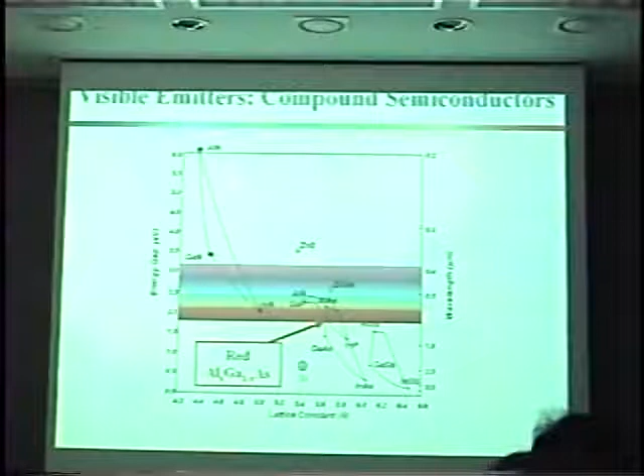I'm sure most people have seen this plot of band gap versus lattice constant. The reason these are two important physical parameters is, of course, that the energy gap is characteristic of the light emission wavelength, and the lattice constant is required because the lattice mismatch often deteriorates the material quality, and generally the devices we're trying to make are heterostructure devices, and if possible we like to do the lattice matching.

So often we're doing band gap engineering, where we're engineering the band gap to select a particular wavelength of emission. At the same time, we're trying to match lattice parameters between active layers and confining layers to be able to get a higher quality device.

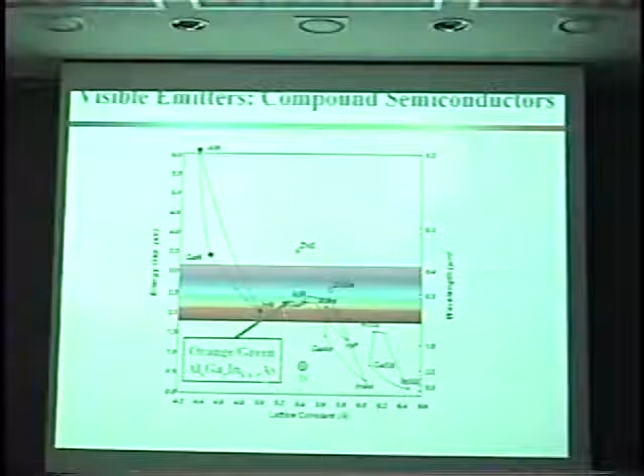In the 1960s, we saw the development of red light-emitting diodes based on gallium arsenide. They were further refined by adding aluminum, and it's a very common product. The price of a red LED today is on the order of a few cents. It's a commodity. Not too long after, we started developing phosphides, aluminum gallium indium phosphide, that gave very strong efficiency into the green region. So for many years we had red and green of the RGB, but we didn't have the blue.

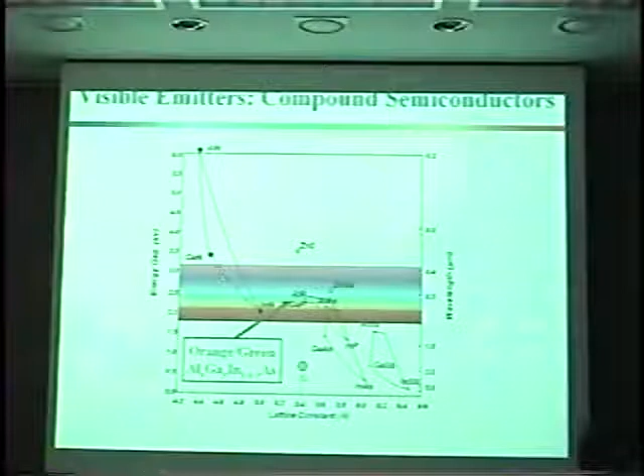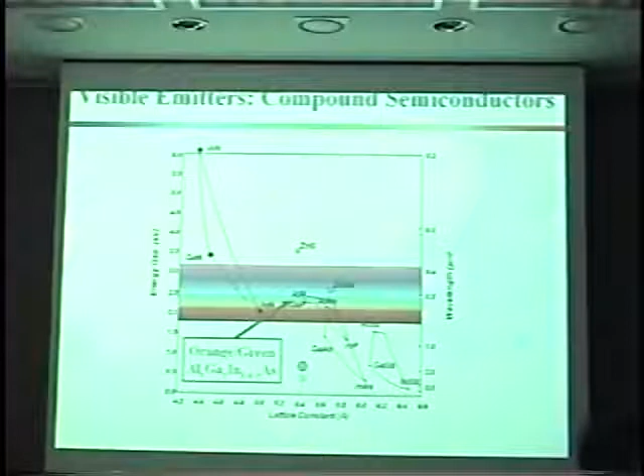And it wasn't until around 1992 when Shuji Nakamura came along and demonstrated that gallium indium nitride, an active layer of a composition somewhere around here, could get very efficient blue emission by forming a solid solution between gallium nitride and indium nitride. So with the advent of the gallium nitride based blue LED, we had the red, green, blue combination, and as a result we have the possibility then for an LED display.

So some of the applications that have come up have all been, of course, based on the LED, because we now have blue, red, and green. But one of the first ones that was promised was the area of solid-state lighting. This is, for example, a headlight in a car, but there's also the possibility of replacing all the lighting applications that we have. The energy savings there is tremendous. It's probably the largest market. However, the efficiency considerations, brightness considerations, and also cost of manufacturing have yet to realize it, except for niche applications such as street lights, signs, and automobile lighting.

But the hope of the future is that the full spectrum of solid-state lighting will be accessible to gallium nitride-based materials. Of course, there's some efforts to try to make the ultimate device, which is the laser diode, which has applications in communications as well as in storage and other areas. One area very interesting to displays is the use of LED for backlighting. I think recently Samsung introduced a 46-inch LED backlit television that's now for sale in the commercial market. And as we've heard over the past couple days, display is a very large market, particularly important to Korea.

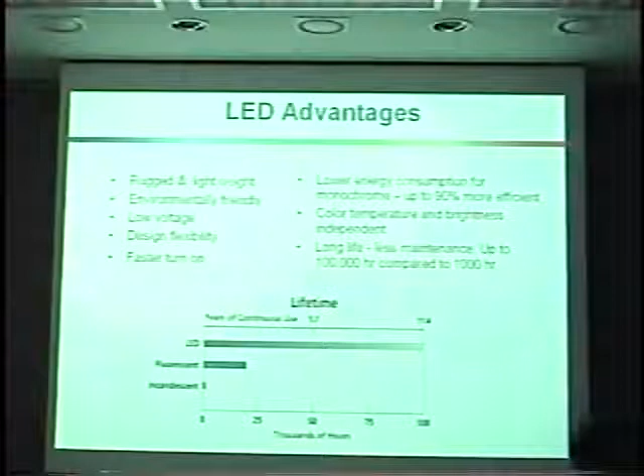Here's a comparison of the LED. It's about 7 times brighter than an incandescent light bulb, for example. The color temperatures and brightness are independent, and of course there's a long lifetime. This is a comparison of the lifetime of an LED versus, for example, fluorescent or incandescent light.

What are the approaches used for white light-emitting diodes? There are basically 3 core approaches. The first one, the most obvious, of course, is now that we have the capability of generating red, green, blue LEDs, let's just combine them to produce white light. Tuning the frequencies and the powers, we can tune the CIE of the white and get excellent control over the color gamut.

A common approach that's over here on the right-hand side is to take a blue LED, which is gallium nitride based, and on top of it put a yellow phosphor, a broad emitting yellow phosphor, which combined with the blue emission will give you a fairly good white light. Most of the white LEDs that you probably see now have a little blue tint to them. They're being made with this particular approach here.

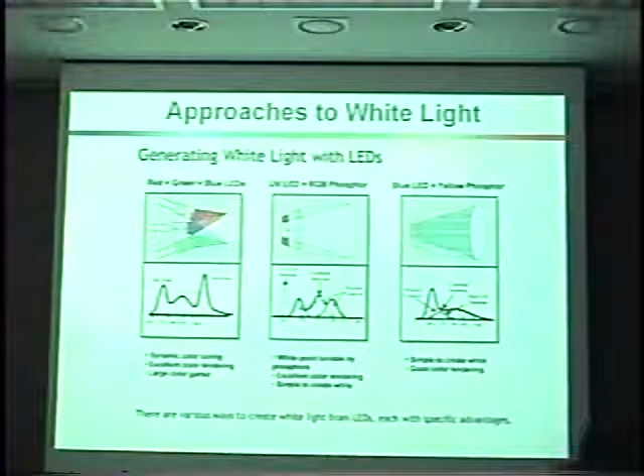There's been some recent work actually in the US, as well as Korea, to try to do a UV LED. Add a little aluminum to it, take it into the UV. This then opens up a wide range of phosphors that are available to do red, green, blue, so we would have a mixed phosphor excited by a UV photon from a gallium aluminum nitride LED, and then we can mix these appropriately and get a very nice white light out of it. Those are the 3 approaches. Most of what you see in the market today is over here.

Okay, I'm going to now talk about 3 or 4 subjects. The first one I'm going to talk about is the substrate issue. The problem with gallium nitride was for many years. Actually, there was a lot of work going on in the 70s to try to produce gallium nitride. At the same time, people were working on zinc selenide in the hope of getting blue. Zinc selenide is where most of the early success was taken. Unfortunately, zinc selenide is a rather soft material, and the quality of the material was not very good. There's also a problem with doping and p-type.

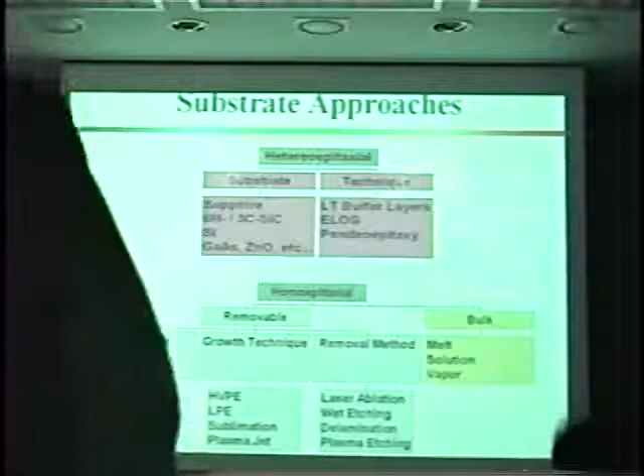But with the advent of high-quality gallium nitride and p-type doping, the gallium nitride work had surpassed the zinc selenide. But there still is not a good substrate for gallium nitride. No one has yet successfully grown large area bulk gallium nitride on a routine basis at low cost, as we have with silicon or gallium arsenide, for example.

So there are basically 2 approaches, 2 general classes that one might take. One is to take an existing substrate, so sapphire is most common, silicon carbide. People have also investigated silicon, gallium arsenide, zinc oxide, a variety of other substrates, and just grow heteroepitaxially on the mismatched substrate. And that's currently what we are doing in the commercial applications.

The problem with that, of course, is that the gallium nitride structural quality is not all that good. The dislocation density is on the order of about 10 to the 8th per square centimeter. It gets somewhat better with some effort, but compared to gallium arsenide or silicon, the dislocation density is extremely high. In fact, that's one of the mysteries of gallium nitride. How can we get devices that are so efficient yet have such a high density of dislocations in the material?

Very surprising, but we do. One suggestion is that the low hole mobility, free hole mobility, is responsible for that. It really doesn't have the ability to get to a dislocation or a grain boundary to recombine non-radiatively. Rather, it sits there and waits for an electron to come by.

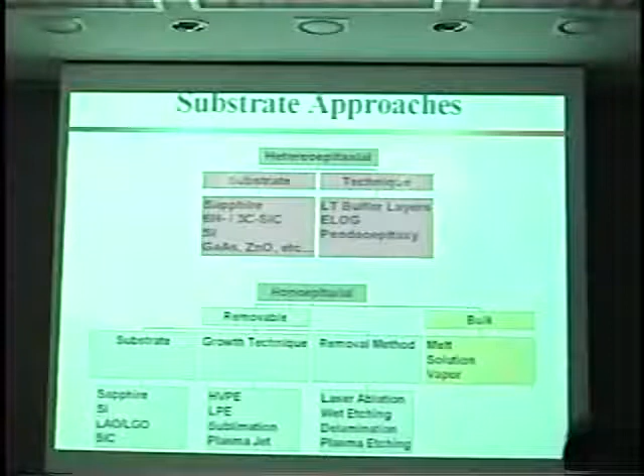What I'm going to talk about today, I'm going to talk about first some of our work with silicon, that is heteroepitaxy on silicon, which I won't show today, but we've been doing some thick film gallium nitride on silicon. And then I'll also talk about growth on lithium gallate, which is almost nearly a lattice match to gallium nitride.

So gallium nitride on silicon. Well, what are the advantages? Of course, silicon is an advantage. It's a very low cost, large area substrate, outstanding quality, zero dislocation density, easily doped N and P type, very good thermal conductivity, which is important for some of these device applications. And if we're going to integrate some of the drive electronics, for example, very easy to do in silicon substrates. So there's a lot of motivation to be able to do gallium nitride on silicon.

However, it does have an extremely large mismatch, 17%. The thermal expansion coefficient is different as well by quite a bit, 56%. So the relatively high temperature growth of gallium nitride, on the order of about 1050 degrees C, produces a large strain, which then can deteriorate the quality of the gallium nitride.

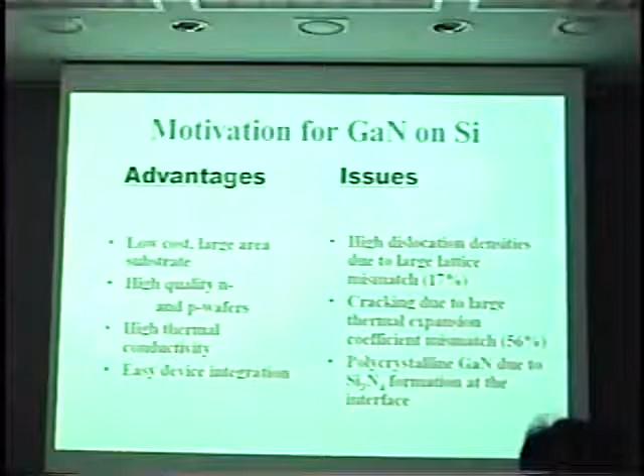Also, people have not had very good luck growing gallium nitride. Gallium nitride will not grow on SiO2. If you remove the oxide and you start your growth and you're using ammonia as your precursor, you'll quickly form a silicon nitride, which again prevents high quality growth on silicon.

So we took our standard approach. We tend to use a little bit lower temperature on our growth than typical, but our standard approach for doing gallium nitride on some other substrates was to grow using triethylgallium and ammonia at 850 degrees centigrade. When we did that, you can see we get polycrystalline gallium nitride. Not very good quality at all. It always resulted in polycrystalline material, only partially covered. We suspected that because we did a nice standard etch on silicon prep, we had a silicon nitride layer forming.

So, like a good chemical engineer, we went to use some thermodynamics. We estimated the phase diagram for the silicon, oxygen, nitrogen, gallium system. That was not previously known, so we had to use some techniques to estimate it. We used a program called Thermo-Calc. And here is the low silicon mole fraction, constant gallium nitride composition phase diagram.

And the thing I want to point out is, as long as we're below this monotectic line, we have only gallium nitride and SiO2 stable. Silicon nitride is not stable. So that suggested to us, if we keep our initial growth temperature down below this monotectic temperature, we should be able to avoid the formation of silicon nitride.

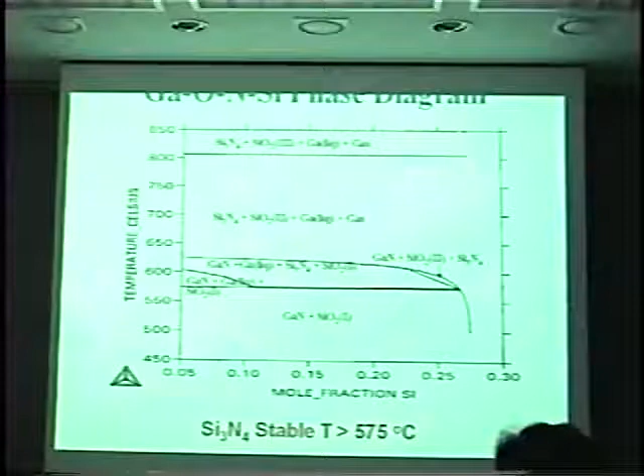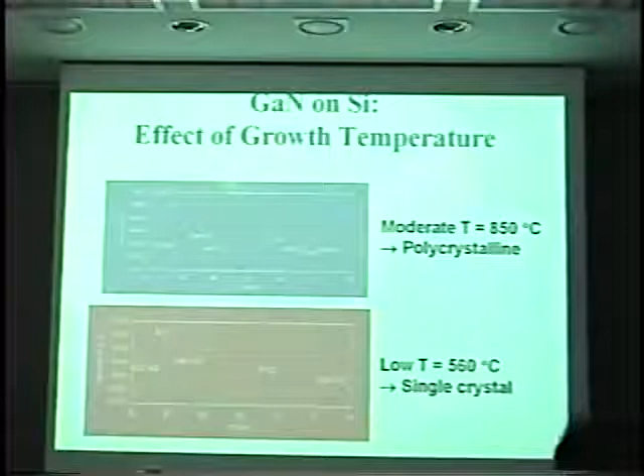Well, here's what we did. Again, comparing what we got at 850 to what we got at 560 degrees C, voila, we have single crystal gallium nitride of relatively high quality. So this technique apparently avoids the formation of the silicon nitride interface.

This is further verified by a high-resolution TEM micrograph that shows the lattice image of silicon 111. It shows a 2 nanometer, 4 or 5 layer silicon oxynitride interface, and then, of course with a small area, high quality gallium nitride C-oriented material. The selected area diffraction pattern shows that indeed it is single crystal, fairly well lattice matched to the underlying silicon.

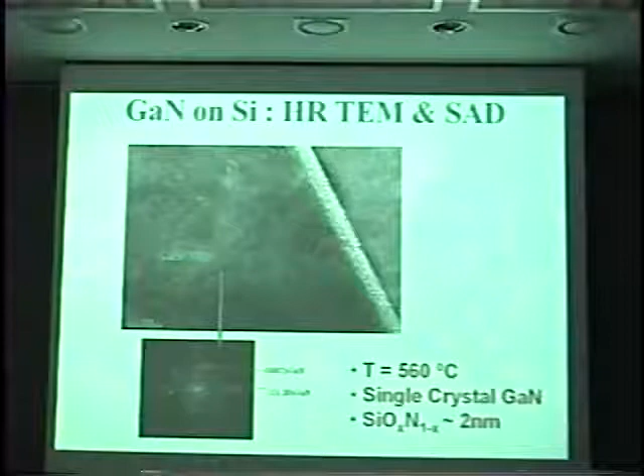There is this layer, this compliant layer that forms during the process. What we believe is going on is, even though we have a clean silicon interface to begin with, there is dissolved oxygen in the silicon, or perhaps we do have a little oxygen coming off the walls, but we form this silicon oxynitride compliant interface. If we go and look at the SIMS profile across that interface, we see both oxygen and nitrogen at that interface.

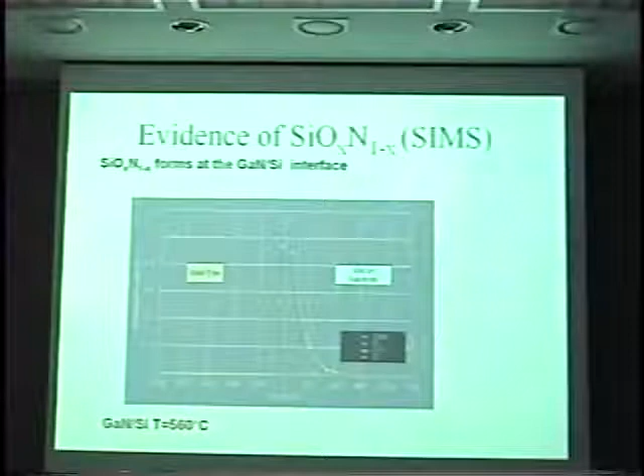And if we go look at XPS to look at the bonding structure, you see that if we expose this surface to ammonia with our cleaning process, we get evidence of both silicon-oxygen and silicon-nitrogen bonds. If we use only inert nitrogen, we have no evidence of the silicon-nitrogen bond, although there's a little bit of residual SiO, either coming from the reactor itself or from just beneath the surface.

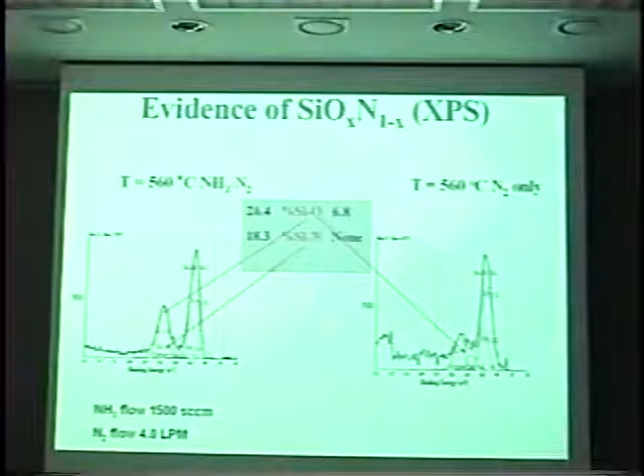So, as a result, we do form this SiON solid solution, roughly perhaps equimolar oxygen and nitrogen bonds, or close to it, that is able to serve as a compliant interface between the highly mismatched silicon and the gallium nitride grown upon it. We find if we get it too thick, it doesn't work. If we get it too thin, it doesn't work. If we change our temperature just above that 575 line, it doesn't work. It's a fairly narrow window where you do get the high quality silicon oxynitride.

We've also looked at trying some other buffer layers. Now that, by the way, was gallium nitride grown directly on silicon. There was no intentional buffer layer placed there. That gallium nitride, I believe, is the highest quality gallium nitride that's been grown directly on silicon to date. It has a full width half max on the high resolution XRD, the 400 reflection, of about 800 arc seconds. So its dislocation densities are on the order of about 10^7 per square centimeter. So for direct growth of gallium nitride on silicon, it's considered very high quality material. It's the highest, I believe, that's been grown.

Another approach is to intentionally put a buffer layer down there that's better lattice matched, or perhaps softer, that can serve as a compliant interface. The candidates I'm going to talk about today are aluminum nitride, which has only a slightly smaller lattice parameter than gallium nitride, as well as zinc oxide, which is fairly closely lattice matched, a little over 2% mismatch, and boron phosphide, which no one has tried before. Boron phosphide is nearly lattice matched, and can also be grown epitaxially on silicon.

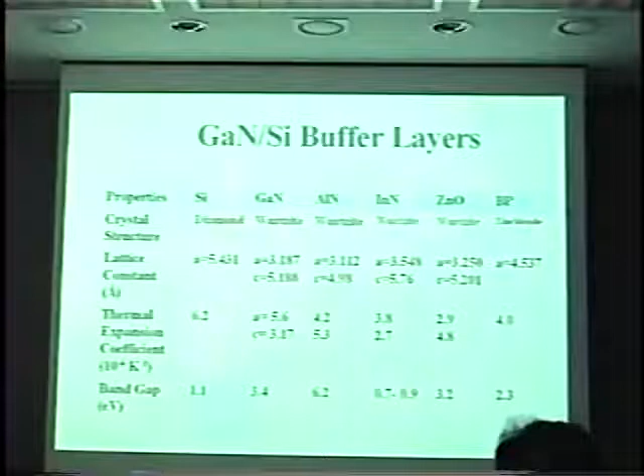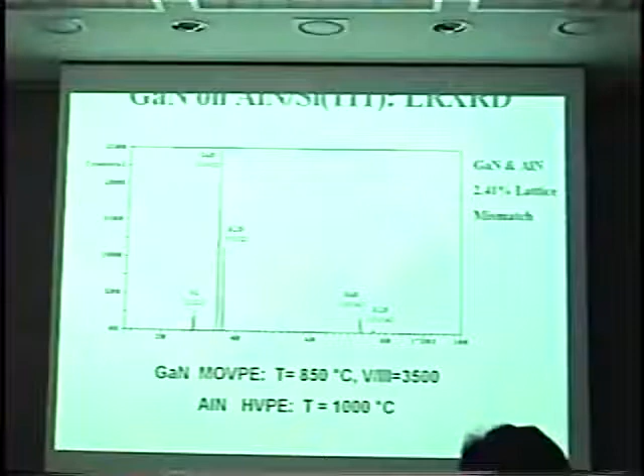So we took some aluminum nitride, we grew it on silicon by hydride VPE, using the chloride of aluminum as well as ammonia at 1,000 degrees C. And we came back and grew in our traditional commercial MOCVD system at our typical growth conditions. And you can see indeed we get single phase, single crystalline gallium nitride. If we look at the quality of the gallium nitride, it is relatively high. In fact, it's the best gallium nitride we've grown yet on silicon.

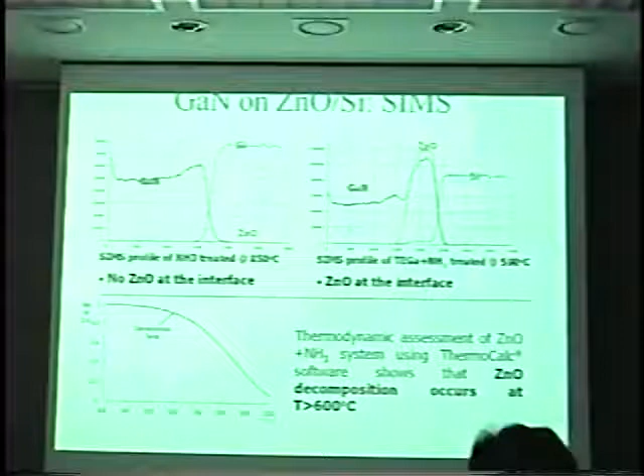Another approach was to use zinc oxide. Zinc oxide is fairly closely lattice matched to gallium nitride. The problem with zinc oxide, though, is it's fairly unstable. Thermodynamic analysis indicates that above about 600 degrees centigrade, the zinc oxide will thermally decompose, and we really won't have the buffer layer to grow upon. In fact, here are some preliminary experiments we did with ammonia treatment. At 850 C, we see no evidence of zinc oxide. The zinc oxide just dissolved into the gallium nitride and underlying silicon. But if we keep the temperature below about 600 degrees C, we can retain the zinc oxide at the interface.

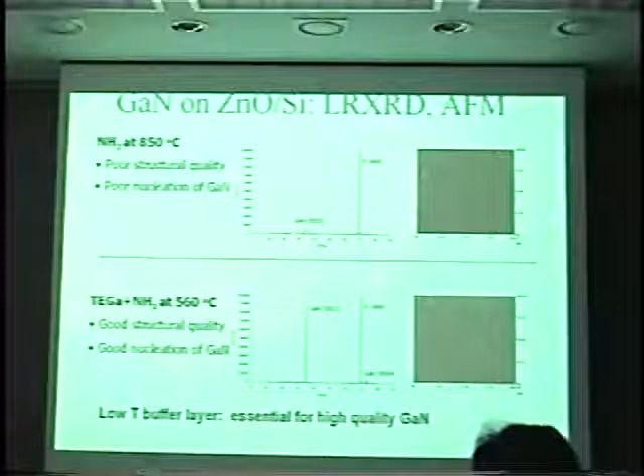Here is just a low resolution XRD scan of gallium nitride grown at the higher temperature. We get very poor gallium nitride signal relative to the underlying silicon. However, doing the low temperature buffer layer growth of gallium nitride on the zinc oxide produced a smoother surface morphology as well as much higher quality gallium nitride.

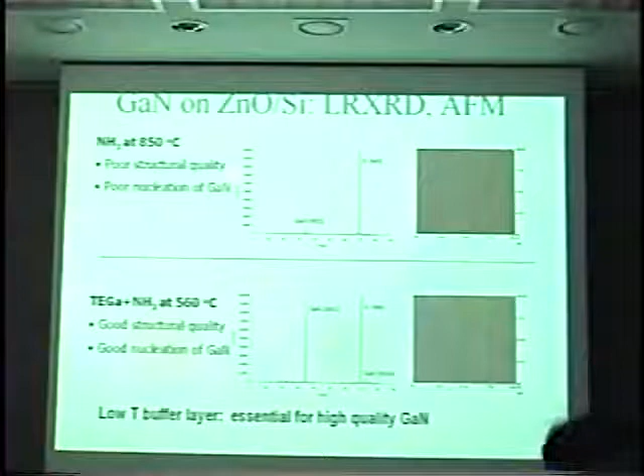The zinc oxide was put down by pulsed laser deposition. Interestingly, it grew C-oriented regardless of whether we were using 111 or 100 silicon. Very surprising. The quality of the gallium nitride grown on the zinc oxide, however, is not as good as that grown on aluminum nitride, or even that directly grown using the in situ oxynitride interface.

We had a program trying to grow cubic boron nitride. Cubic boron nitride, as you may know, is a very difficult material to grow. It's very hard. It is also easily doped, and so it was suggested for ultra-high temperature power electronics using diamond/boron nitride interfaces to develop PN junctions.

One of the approaches we tried to grow cubic boron nitride was to first grow boron phosphide. Boron phosphide is relatively easy to grow. We use boron trichloride and phosphorus trichloride or phosphine, and we're able to grow successfully boron phosphide on silicon. Also, nitrogen or ammonia should reduce boron phosphide to form boron nitride.

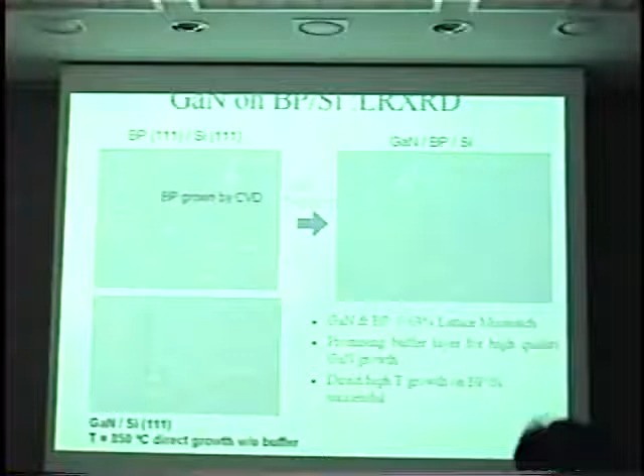So we took some of our boron phosphide that we had grown by CVD, and we tried to grow directly at high temperature without a buffer layer the gallium nitride, and the result was very, very good. We got single crystal gallium nitride, fairly high quality, and you can see strong 002 reflection as well as the 004 reflection. And this has encouraged us to continue on with boron phosphide as an interfacial buffer layer.

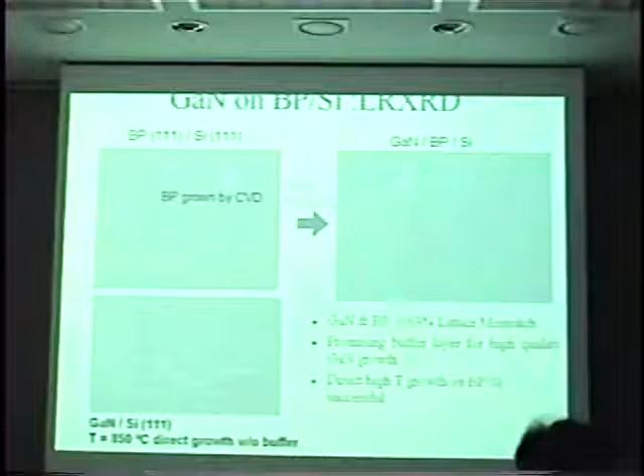So I think work that we've been doing over the last few years of trying to grow gallium nitride on silicon is very promising. And eventually, I think for some device applications, silicon may become the preferred substrate. We've also been trying, once we take this fairly high quality gallium nitride on silicon, to grow very thick films of gallium nitride, on the order of a few hundred microns, and then to remove the silicon and leave behind freestanding gallium nitride.

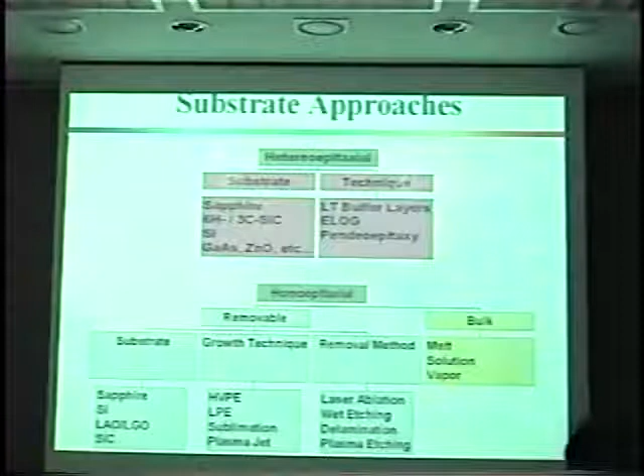I won't show you the results, but I'll report that we have successfully grown thick gallium nitride on silicon without cracking. And so that's a fairly good result. Part of the result is having that compliant layer, but it's also a result of us using a lower growth temperature and therefore incorporating less thermal expansion strain energy.

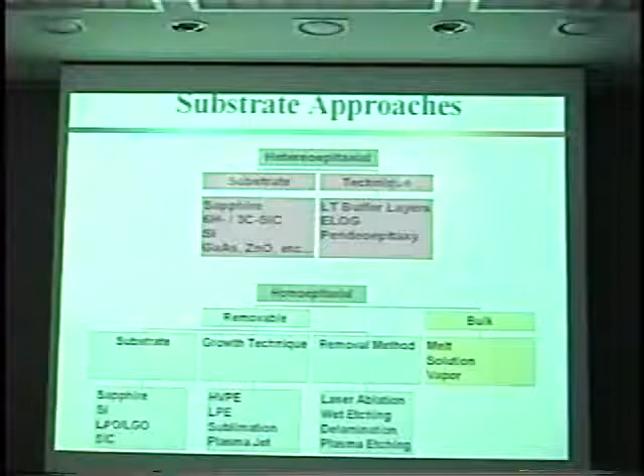All right, I'm going to move now and talk about growth on lithium gallate, LGO we call it. And so the idea here is to first grow a seed layer of gallium nitride onto LGO using traditional techniques, and then come back and grow very thick by hydride vapor phase epitaxy a few hundred micron gallium nitride, and then to remove the substrate.

Okay. So people have tried all these substrates to date. They've tried these techniques, not all to each substrate, and there's a variety of techniques people have used for removal of the handling substrate. The approach I'm going to talk about is LGO as the substrate, an MOCVD buffer layer, and then hydride VPE growth of thick gallium nitride. And what's going to be unusual is that if conditions are chosen right and the interface developed correctly, we can get the gallium nitride to release automatically from the underlying LGO substrate without any removal, and the LGO substrate can be reused.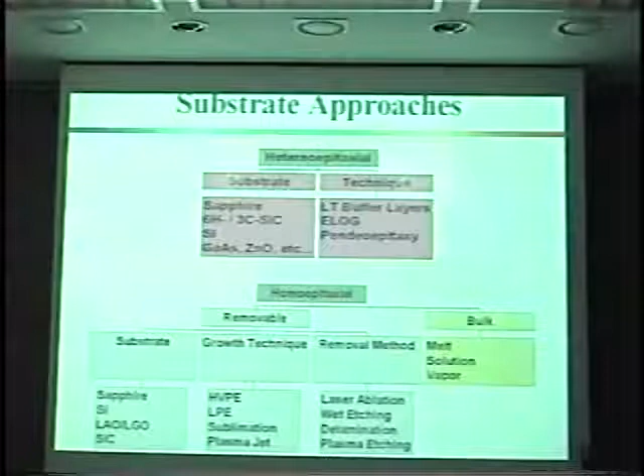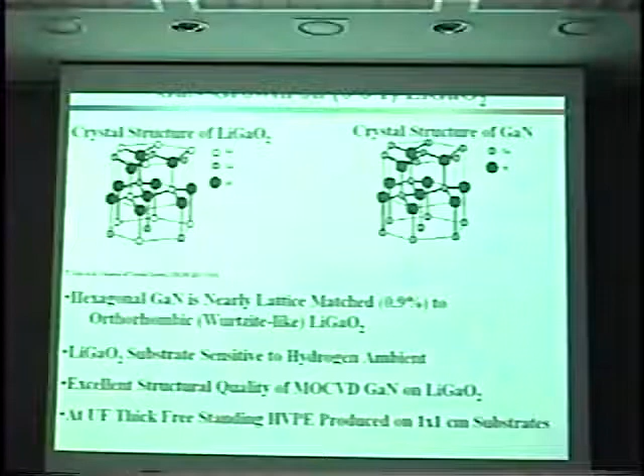Here's the crystal structure of LGO. It's orthorhombic, but it's nearly hexagonal and a very small mismatch to gallium nitride. Some results that compare what were some of our first attempts. We would take as-received LGO. It was just being produced and it was not available commercially when we started. You can see the top surface is not crystalline. There's a lot of damage. The polishing procedures were not in place.

However, we found that if we would do a nitridation of the interface, and this is the LGO, this is an interfacial layer, and then we would have gallium nitride going on that. If we just did a nitridation of the LGO at 850 degrees C, we would form this very thin, on the order of about 20 angstrom, lithium gallium oxynitride compliant layer. And not only that, which is very unusual, the underlying LGO would actually epitaxially grow, most likely from deep in to the surface, to leave behind single crystal lithium gallium oxynitride on top of single crystal LGO.

And a real nice interface. We were also worried about lithium diffusion into the gallium nitride. This layer here served as a nice barrier. We saw no evidence. In fact, we estimated the lithium diffusivity at about 10 to the minus 17. Some profiles that we took.

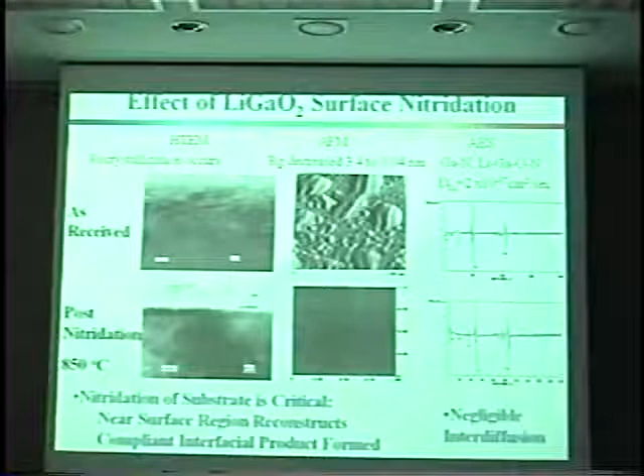Once you get that interface properly designed, you then can go and use traditional techniques for growth. Here's some MOVPE gallium nitride micron film that we grew on top of it. This is the lowest full width half max we've ever recorded for gallium nitride, of about 21 arc seconds. That's approaching the quality of gallium arsenide.

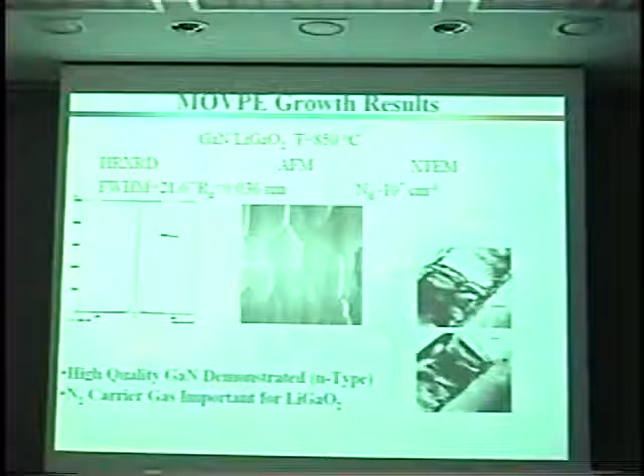And so here's a low resolution TEM micrograph showing the cross section. We had to look pretty hard to find a few dislocations. Next job then was to grow a very thick gallium nitride, on the order of about 200 microns. We did this using hydride VPE, but a redesigned one.

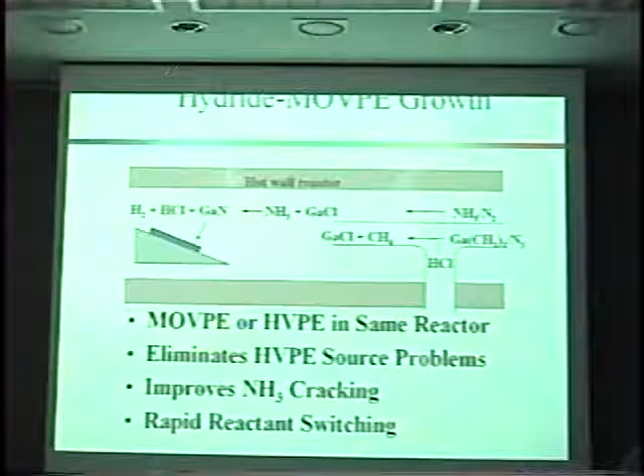In traditional hydride VPE, we'll take HCl, pass it over liquid gallium to form gallium monochloride, and use the hydride ammonia as your precursors for CVD. We combined MOCVD with hydride VPE in the sense that we took trimethyl gallium, which is an organometallic, reacted it upstream with HCl to form the gallium chloride in a hot wall reactor, and in the deposition zone it looked like a hydride reactor. In the source zone, it looks like an MOCVD system. And so we combine the best of both designs.

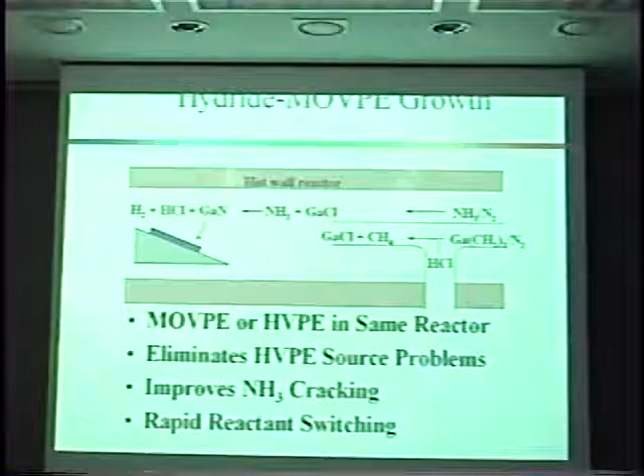That is, we can get rapid reactant switching, we can get clean sources, but at the same time we get the high growth rate of hydride VPE, and we also get the low impurity concentration advantage of having chlorine in the system. In addition, the HCl or the chlorine in the system helps lower the cracking temperature for ammonia and allows you to go a little bit lower growth temperature at the same quality and growth rate.

The process we ended up with was one in which we took our handling substrate, and I'm talking about LGO at this point. We put this reaction layer, this buffer layer, this interfacial layer that we designed. It was the gallium lithium oxynitride. We grew a buffer layer or barrier layer using traditional MOCVD at about 850 degrees C. We then went into our thick growth using hydride VPE.

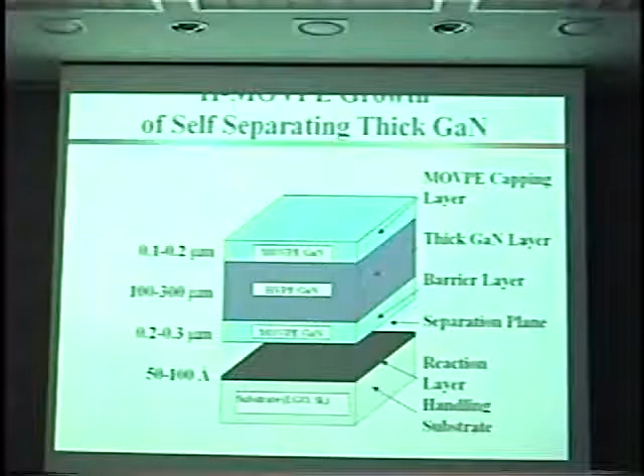Interestingly, when we grow hydride VPE, we become nitrogen terminated, whereas when we grow MOCVD, we're gallium terminated, so we get a polarity switch when we switch growth techniques. The nitrogen terminated surface grows very rough, so we would have to come back and grow a capping layer by MOCVD to revert back to the gallium terminated phase and to grow a nice smooth surface. When we do that, we can produce freestanding gallium nitride.

This was produced back in, I think, about 1998 actually. At the time it was the world's largest piece of freestanding gallium nitride. And very high quality. That piece has a full width half maximum of about 47 arc seconds. What's really interesting is it's self-separating.

That is, when we cool in the reactor the LGO with thick gallium nitride on top of it, we would pull it out, and the gallium nitride would be freestanding, and you just lift it right off. And looking at both sides of the gallium nitride, it was separating between the oxynitride buffer layer and the gallium nitride grown by MOVPE, which allowed reuse of the relatively expensive LGO substrate.

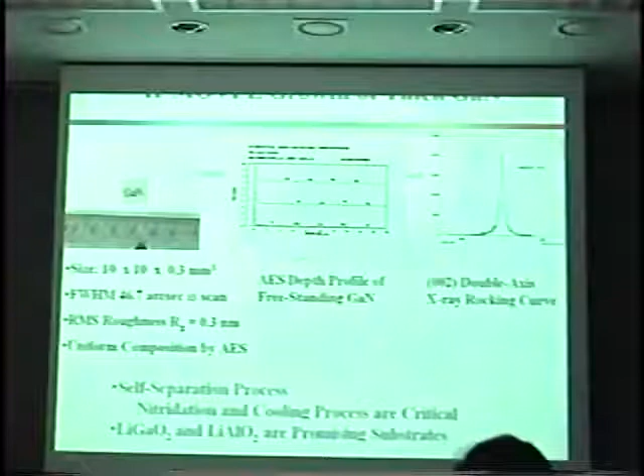Okay, I'm going to switch gears here one more time, and I'm going to talk a little bit about CVD and some chemistry work that we've been doing. There are basically two chemistries used in almost any CVD. One is to use a metal organic precursor, which then undergoes irreversible thermal decomposition and produces a large driving force. It was developed in the early days to do epitaxy on foreign substrates.

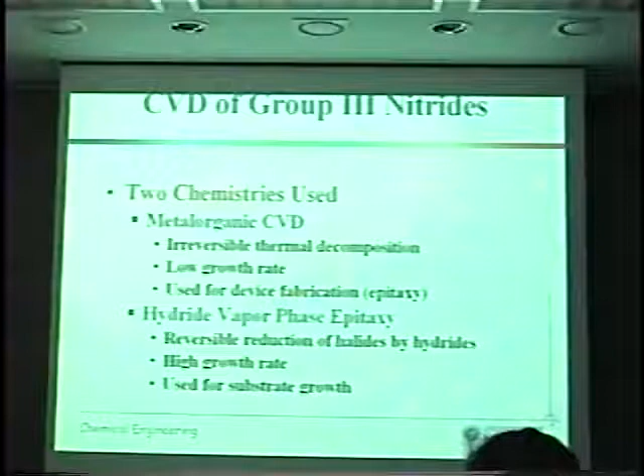Hydride VPE is a reversible chemistry. It's a reversible reduction of halides, and is actually the first chemistry that was developed. And as I said, it usually gives a much higher growth rate, maybe about 100 times higher growth rate than you can get from MOCVD. So here's a system.

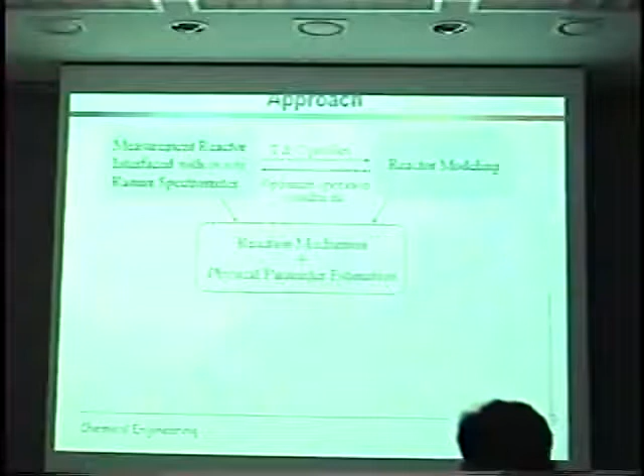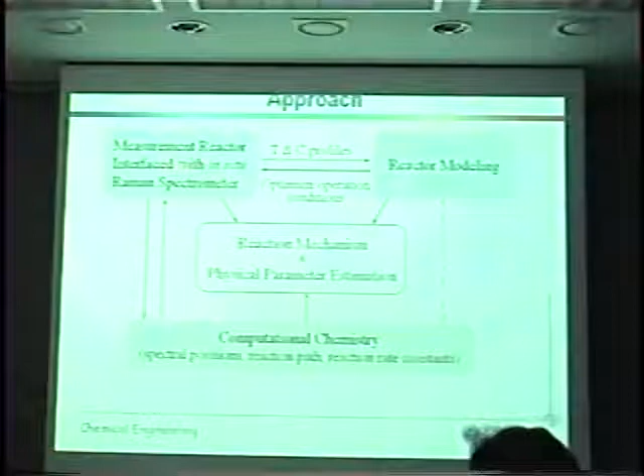Here's a system. I'm going to skip through a couple of slides and just tell you about what we're doing. We have developed a reactor that has a Raman spectrometer outfitted to it. With this spectrometer, we can measure temperature and concentration profiles by looking at the Raman scattering signal, or in some instances, we've been using laser-induced fluorescence.

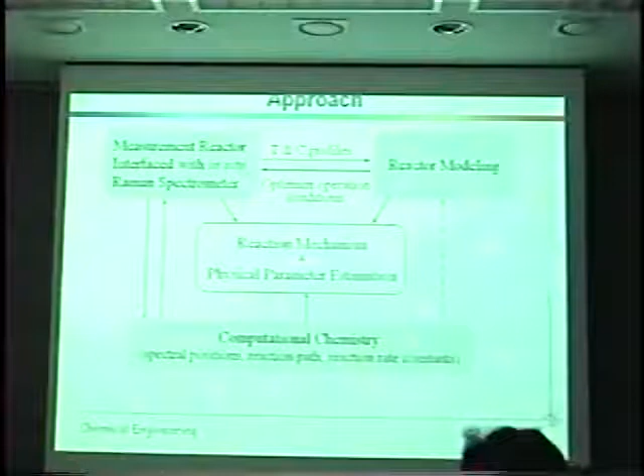Then we've developed a model, a full two-dimensional model of the reactor, to be able to take the measured profiles and solve the inverse problem to estimate rate constants, cross-sections, and diffusivities of our species. And with identification of species, which is helped by computational chemistry, we can develop reaction mechanisms.

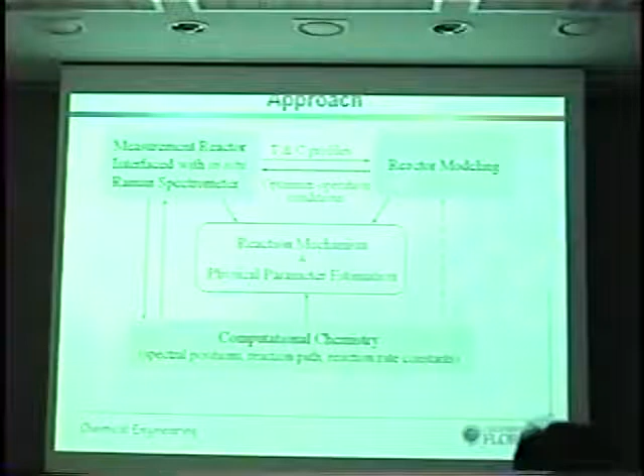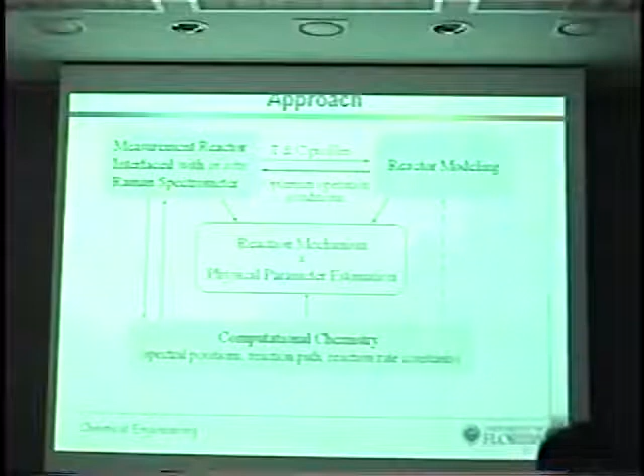So, as a chemical engineer knows, a CVD reactor is nothing more than a gas-solid reactor operating under fairly reasonable or easily modeled conditions. The problem is that we really do not have the kinetics, quantitative rate parameters and mechanisms to go in and do a chemical engineering design of a reactor. So we set about correcting that by putting this reactor together. And I'm going to step through some of this.

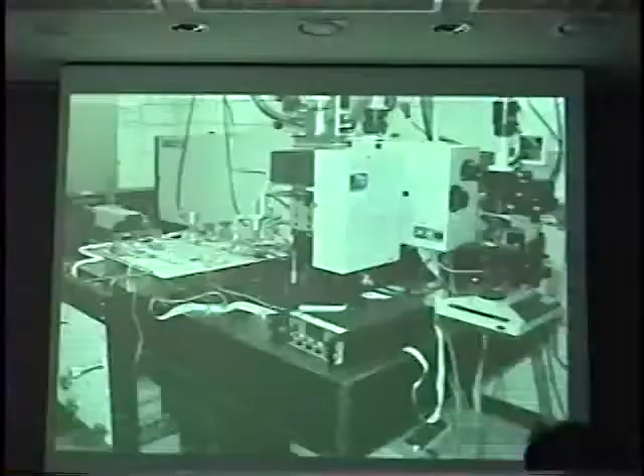Just to tell you a little story. The story is trimethyl gallium decomposition. Ammonia decomposition is well known. The first step, forming NH2, is very slow, and after that it proceeds fairly rapidly. This has been well studied over the years, and rate constants are out there and well known. Trimethyl gallium was studied in the 1970s.

It was thought to undergo a sequential homolytic fission of the carbon-gallium bond, producing the dimethyl, this being the rate-limiting step, then quickly the monomethyl, which is relatively stable, and it would subsequently be converted to the element, each time giving off a methyl radical. That was pretty much the state of what was known about trimethyl gallium decomposition, and so we set out to study it.

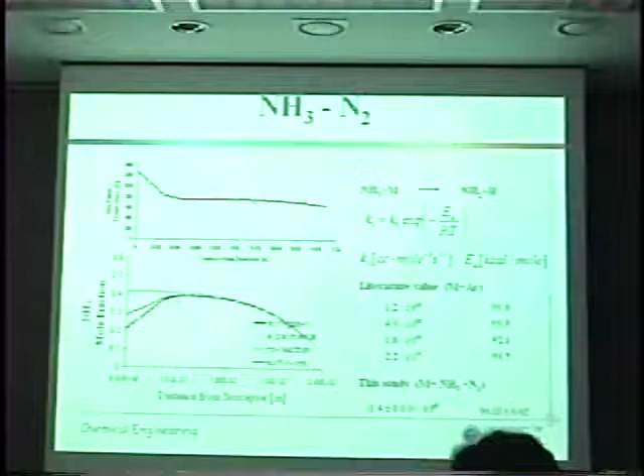The first thing we did was look at ammonia decomposition, which I said is fairly well known. Here is the temperature profile. Here are the compositions measured. And indeed, when we estimate the rate constants, you can see for the first step we get very good agreement with what's in the literature.

We also then looked at trimethyl gallium decomposition, and consistent with other in situ measurements in the literature, we get a much lower start temperature extending over a larger temperature range, which would give you a different rate than that measured by ex situ techniques such as mass spectrometry. But we were able again to identify the rate constant for breaking that first carbon-gallium bond.

But that's not the whole story, because ammonia decomposes very slowly. It requires a high temperature, whereas trimethyl gallium begins to thermally decompose around 200 degrees C. Yet we're able to grow. In fact, the breakthrough that allowed, I believe, the first blue LED to be grown was a reactor design change that allowed trimethyl gallium and ammonia to be delivered in a way that could react at the surface and produce gallium nitride at 1,000 degrees centigrade.

What we discovered is that trimethyl gallium and ammonia at low temperature in the inlet region are actually forming an adduct. This adduct can then undergo further reaction by attack of trimethyl gallium to form an oligomer, a polymer, and this polymer can coat out on the surface. It can also undergo an intermolecular reaction to produce the same oligomer.

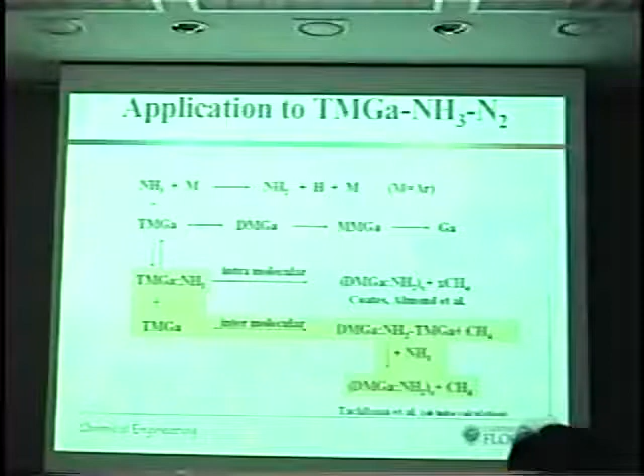Here are some examples of how we discerned this mechanism. This was a spectrum taken, measuring compositions or relative intensities for the trimethyl gallium, the polymer, as well as the adduct, as a function of distance from the susceptor. So this is the hot wafer for deposition. This is our inlet stream.

First of all, we formed the adduct only upstream, and then under its own vapor pressure, we transported it in ammonia and nitrogen, and look what happened. We have the adduct coming in, and at about, I think, 250 degrees C, the trimethyl gallium ammonia adduct starts to decompose.

At the same time, you start to see the polymer appear, but you also see trimethyl gallium start to appear, because it's undergoing the reverse reaction back to trimethyl gallium and ammonia. Once the trimethyl gallium starts to appear, it also starts to attack the adduct to form more oligomer.

And eventually, we reach the point where the trimethyl gallium then will start to decompose itself back to monomethyl gallium, and that's what's being delivered, trimethyl gallium and monomethyl gallium, to the surface. This polymer is not participating in the reaction in any way.

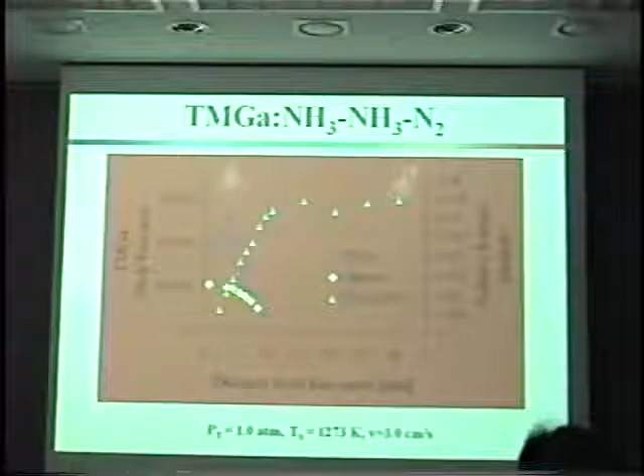The real system, here are the results. This is trimethyl gallium, the adduct and the oligomer again, but with a mixture of trimethyl gallium, ammonia, and nitrogen. That is the real reacting system. So what happens is, if we look at the trimethyl gallium, we're feeding in trimethyl gallium, but it's starting to disappear, even at low temperature. This is really close to room temperature.

And what's happening, of course, is it's starting to form the adduct, and removing that. The trimethyl gallium then will attack the adduct and start to form the oligomer. Even at this very low temperature, you see you get the oligomer formation. Once we get to the hot zone, we then have the release of trimethyl gallium from the adduct. It starts to disappear, and as a result, with the trimethyl gallium being present and the adduct, we get additional oligomer formed.

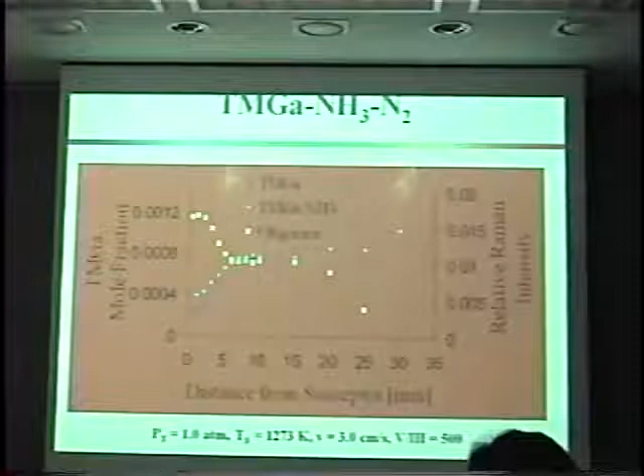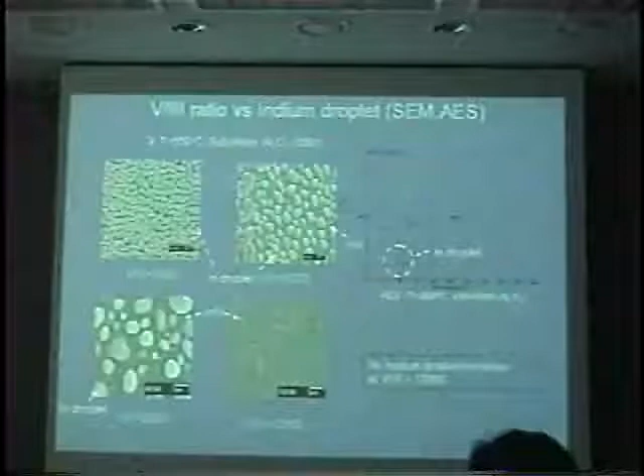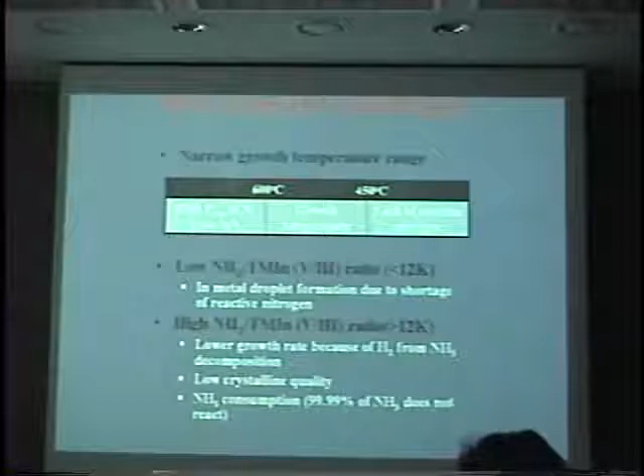We've been doing some work on indium nitride. This is pure indium nitride. There's been almost no work done on this. Indium nitride is difficult to grow because it has a fairly low thermal decomposition temperature, about 600 degrees C or so. It starts to thermally decompose. It's also difficult to grow at that low temperature because of the ammonia decomposition. Forming a solid solution with gallium nitride is difficult too, because it's immiscible. Its solubility is only on the order of about 10 to 20% on either side of the phase diagram.

To complicate matters further, there is uncertainty today about what the band gap energy of indium nitride is. It's been reported in the range of 0.7 eV to 1.9 eV. You would think at this day and age that we would actually know the band gap of indium nitride, but we really don't. Obviously, it can be varied.

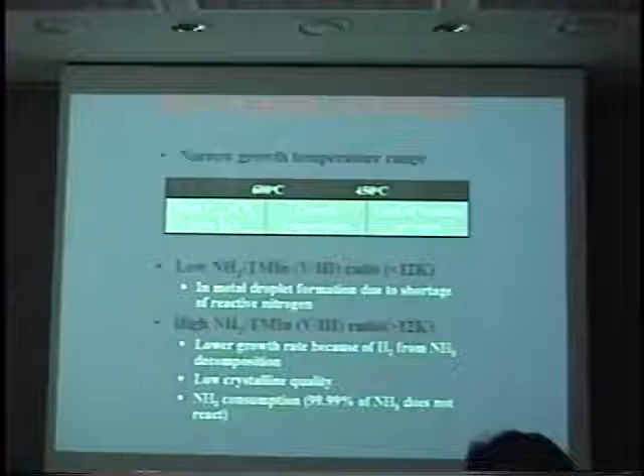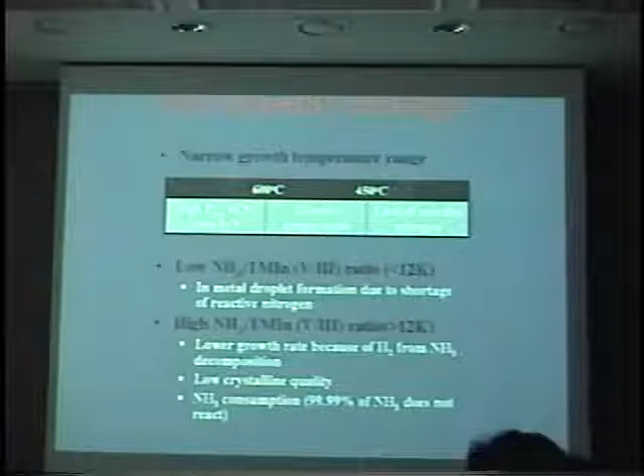So this opened up to us the possibility of doing RGB in a single material. That is, we could do indium nitride with a little bit of gallium added back into it, up to maybe 10%. We could get red and green if we could understand how the band gap varies. This would be 0.7 to 1.9 variation. And then add gallium nitride with a little bit of indium nitride back into it to get the blue, as we do today. So we have the possibility of doing RGB. And so we've been doing a lot of work on growing that.

I'll just end with one slide. One of the things we did was be able to grow it. We had to get rid of the indium droplets that would form. We did that by adding HCl to the system very nicely. But in fiddling around with this, we found that under certain conditions, we could grow nanorods. These are very nice hexagonal solid nanorods of indium nitride.

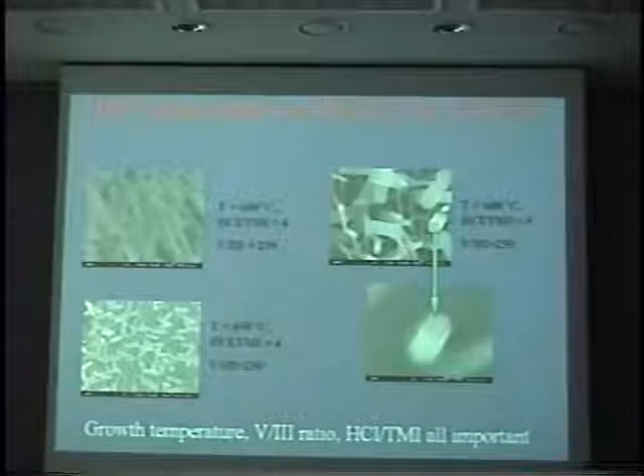And so we're working on these materials now, and just last week we put a sensor together that was able to detect hydrogen at various parts per million reversibly, and was not sensitive to oxygen and some other molecules. What was really nice about this was the low power. This is one of the lowest power room temperature hydrogen sensors that has been reported to date.

So with that, I want to thank you. I think the future is bright because gallium nitride is going to light the world up. And I'll be happy to entertain your questions.